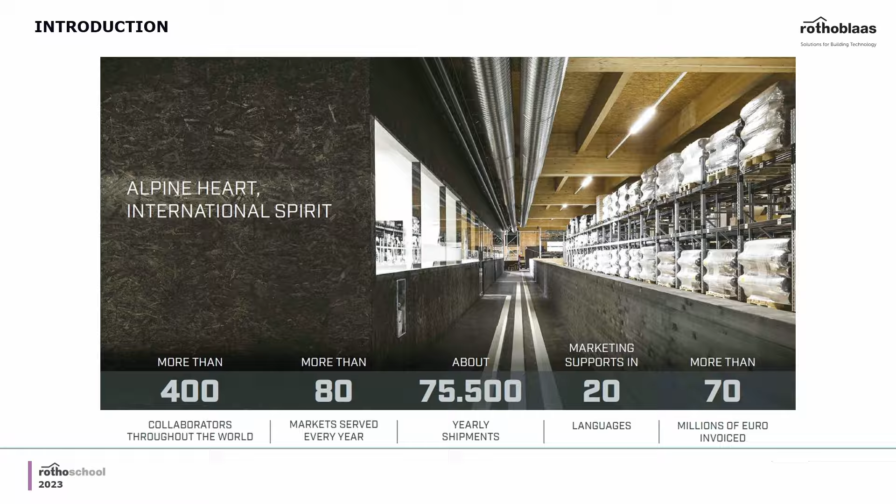As you can see here, we are more than 400 workers in Rothoblaas at the moment. Actually, we are almost 500 as we speak, because we keep on growing and growing. And as you can see here, but we're going to discuss more in detail also in the video lessons, this particular mass timber structure, we just recently finished the construction of this massive and very nice automatic mass timber warehouse that we have here in our headquarters of Rothoblaas. And this has already doubled the existing warehouse space that we have in Rothoblaas. So for us, it's practice what you preach.

We preach with our Rothoschools around the world to use timber, and also for our own project, we use timber. The use of wood and of timber structure, of course, for us is very important for, as you all know, a sustainability point of view, very, very important. And this is why we preach also the use of this kind of material, structural material in this sense. But of course, as you all know, timber is a material that a lot of people are passionate about, and myself, I'm the first one to be passionate about it. And second of all, it has a lot of very, very good structural characteristics that we'll see throughout the video lessons. And this is why a lot of people love timber, not only because of its beauty, but also because of sustainability and great performance, really.

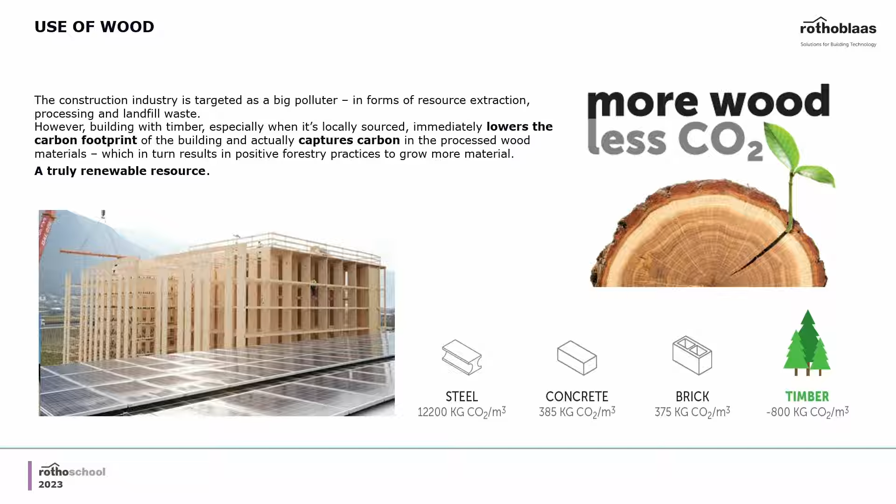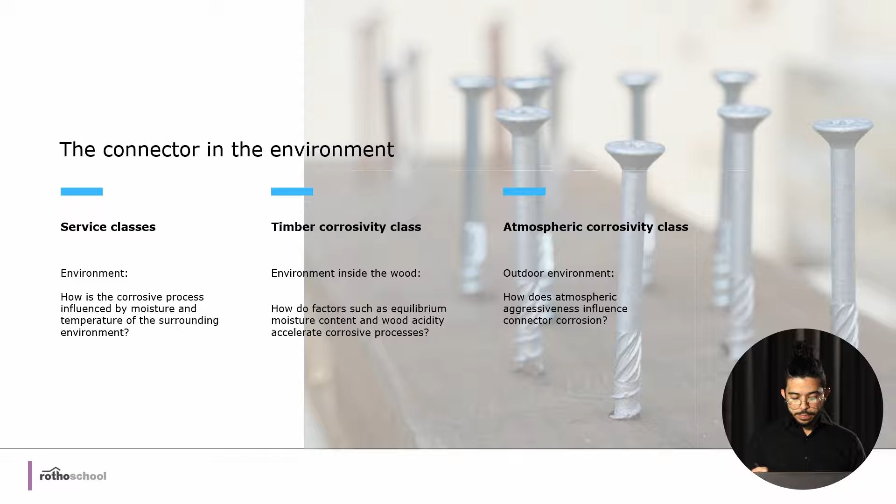To begin, we need to understand that corrosion is a completely natural phenomenon. It is not a matter of if corrosion will happen, but when it will happen to any metal, in this case fasteners. When we add energy to any mineral to transform it into a metal, in presence of the environment, that metal will tend to convert back to its initial mineral form. It is a natural phenomenon triggered by the contact of this new metal with the environment.

For corrosion to occur, three factors need to be present. I'm not a chemist, so I won't go deep into the electrochemistry of the process, but you need to know we need three things. The first, pretty obvious, is that we're talking about a metallic element, so we need an anodic reaction represented by the metal. A cathodic reaction, often represented by oxygen, so we need oxygen present. And finally, an electrolyte that allows current circulation, generally water. In residential and most construction cases, this is represented by water, so we need all three elements.

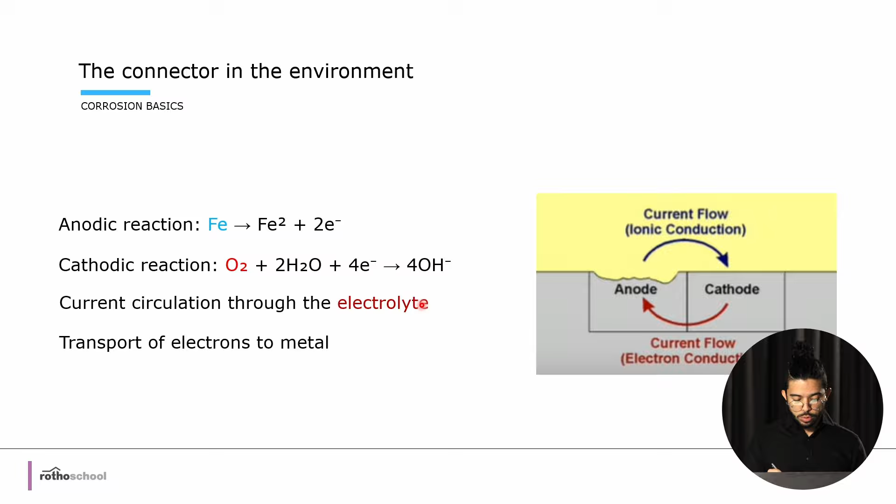There are three concepts within the regulatory framework, those same three concepts we saw earlier, represented by different parameters in different norms. The service classes are inside Eurocode 5, and the characteristic parameters that determine the service classes are atmospheric humidity, temperature and moisture, and exposure time.

The atmospheric corrosivity class is presented in ISO 12944, an international standard. It depends mostly on zoning - whether there is an urban, rural, or marine environment - and the presence of polluting agents such as acid rain or chlorides. Finally, the timber corrosivity classes, the newest concept, are presented by the recently approved European standard 14592. It depends exclusively on equilibrium moisture content and acidity. There are other factors that could affect timber corrosivity classes, which we'll look at further in the presentation.

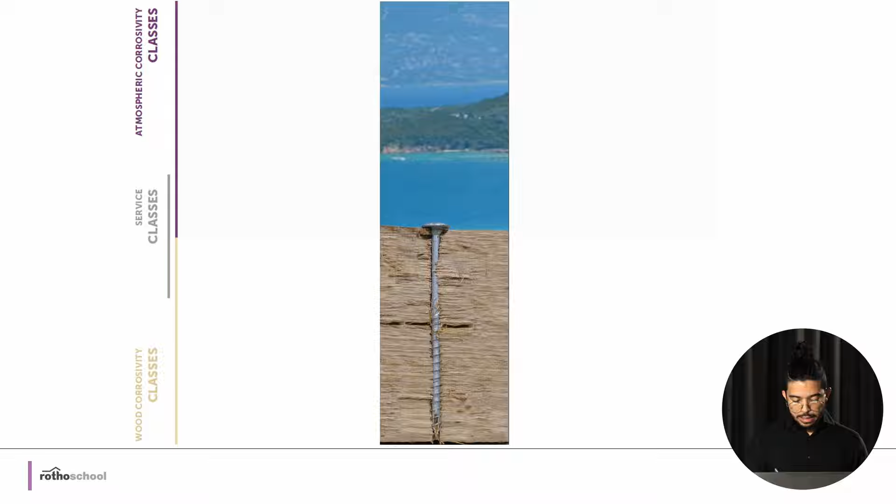So how do these three concepts play together? In the case of a fastener installed in a timber element, these three concepts act in different parts of the connection. The atmospheric corrosivity class concerns mostly the exterior and the contact of the fastener with the elements in the environment. So you'll have mostly the exposed head of the screw affected by the atmospheric corrosivity class. A small part of the screw in contact with timber will also be affected, but it's negligible, as atmospheric corrosivity class depends mostly on the ability of deposition of polluting agents, such as acid rain or mostly chlorides in this case.

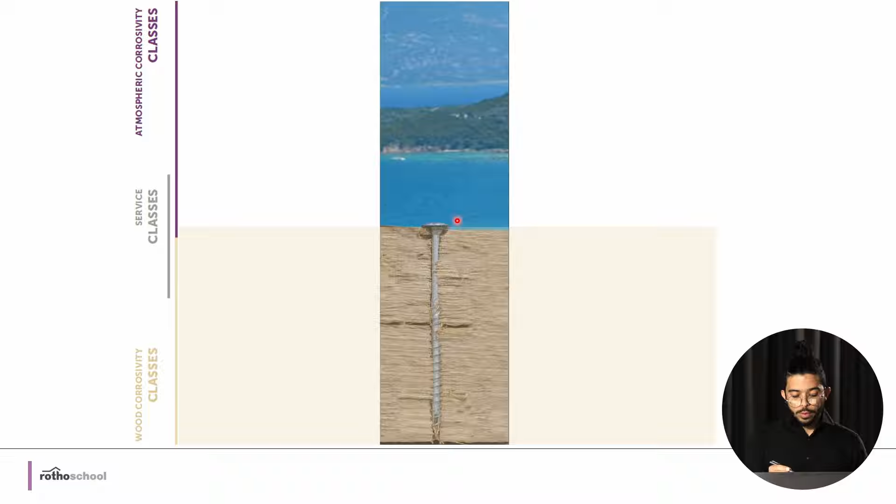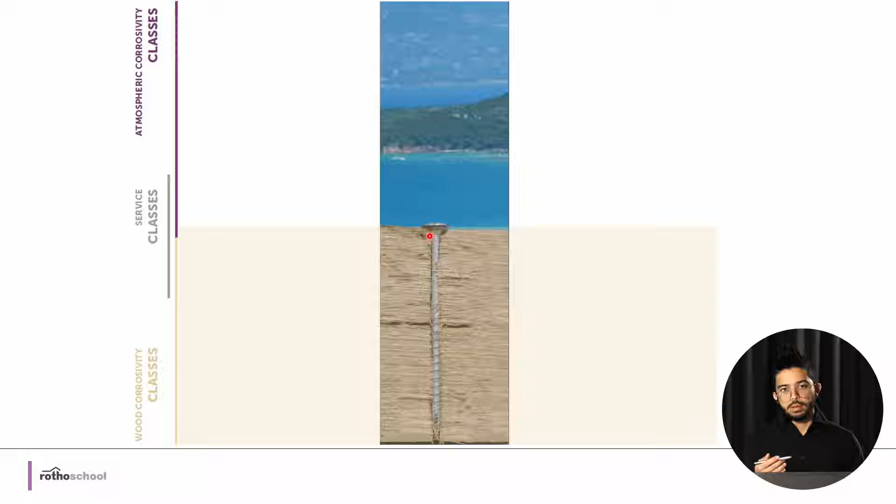Wood corrosivity classes concern where the element is inside the timber - from the tip of the screw to the external part of the wood where the screw is placed. If it was a plate, it could also be subject to wood corrosivity classes, concerning where the plate touches the timber. So everywhere the fastener, the metal, is in contact with the timber, the wood corrosivity class will affect the corrosion behavior of the connection, but no further.

Finally, the service class, the easiest of the concepts, takes into consideration the moisture content - I mean the atmospheric humidity - and the moisture content of the wood in the context of that atmospheric humidity. It's sort of a bridge between the atmosphere and the wood, but it mostly concentrates on the parameter of moisture outside and inside the timber, and temperature.

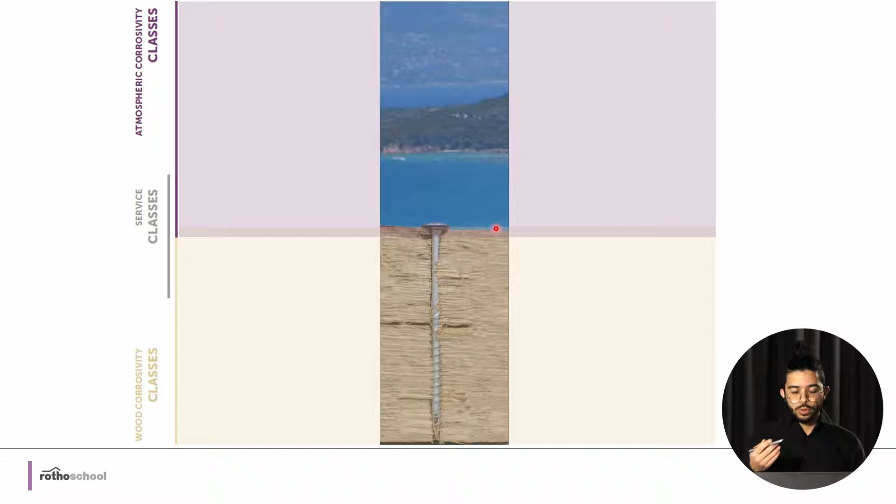When you see the two classes together, there is little to no intersection between those two affection zones, only a small line where wood corrosivity class and atmospheric corrosivity class intertwine. The wood corrosivity class ends with the wood, and the atmospheric corrosivity class starts after the wood. Put together, the wood corrosivity classes and atmospheric corrosivity classes are the link, the bridge between them.

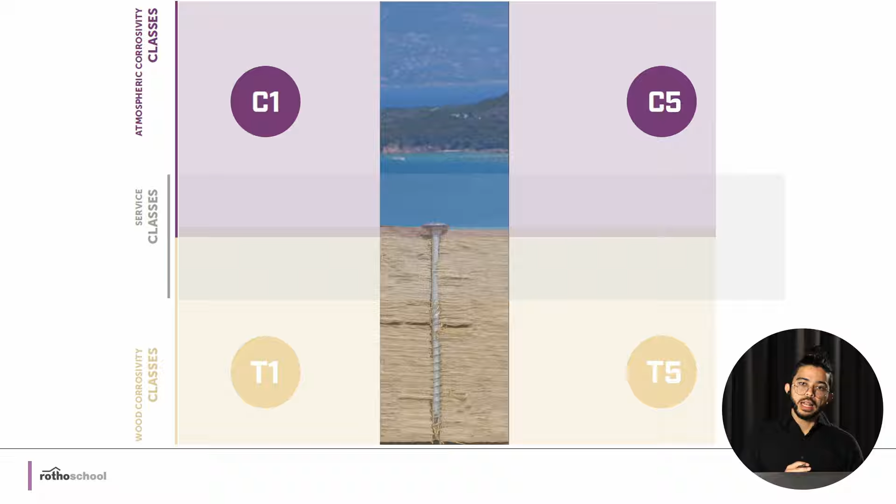The atmospheric corrosivity classes go from C1 to C5, represented by the letter C as already presented in the ISO standard. The timber class, the newest class, goes from T1 to T5 in an analogous way, T1 being the least aggressive, T5 being the most aggressive. Same for the C class.

Finally, service classes go from 1 to 3, service class 1 being the driest, and service class 3 the more humid. The newest Eurocode 5 will present a new service class, service class 4, which will be the maximum of the service classes.

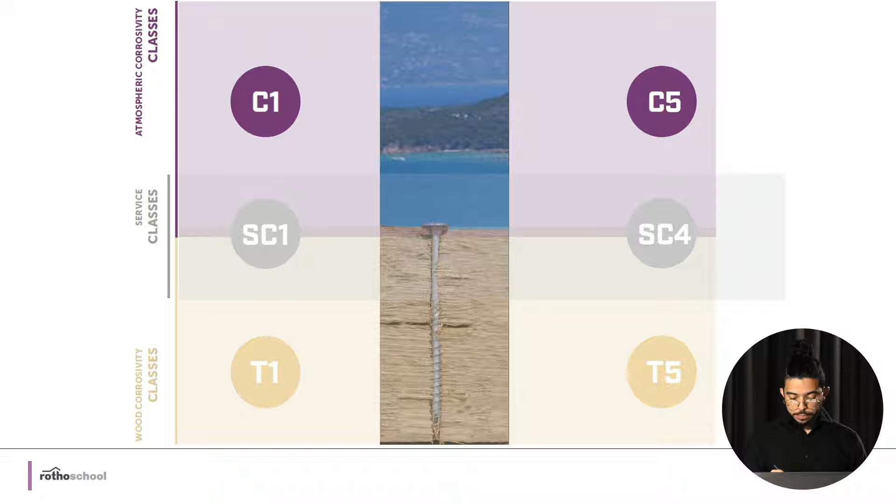As of today, in Eurocode 5, 3 classes are presented for service class. Class 1 is represented by 65% external atmospheric humidity, which translates to an equilibrium moisture content of 12%, the humidity inside the wood. It's normally what you would consider for an interior environment.

Service class 2 would be 85% atmospheric humidity, with an equilibrium moisture content inside the timber of around 20%. It would generally be an element that is not inside, that is in an exterior, outdoor environment, but not exposed to weather conditions.

Finally, service class 3 was for elements more humid than class 2, where equilibrium moisture content was above 20%, categorized as wet elements. This is the current state of the art, what the standards currently present.

What is coming in the new Eurocode 5 will be 4 service classes. Mostly service class 1, 2, and 3 would remain as they are now, and service class 4 would be the new one. There are well defined threshold limits from one to the other, represented by a maximum or upper limit, and an annual average.

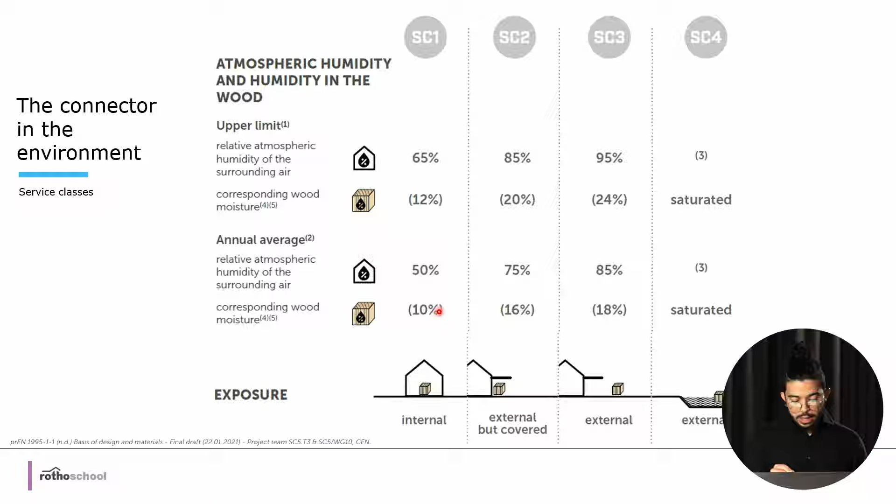This is also a novelty, the annual average. You can measure the service class based on the limit or the annual average. So inside the timber, you have 10%, 16%, 18%, and saturated.

We will check in the next slides why this is happening and why it makes sense. But this is in general the novelty of it.

Service class 1 in terms of exposure will remain generally the most common case, internal elements. Service class 2: external but covered or protected against weather conditions. Service class 3: external elements unprotected. Service class 4: external wet elements that are saturated.

The atmospheric corrosivity class is classified from C1 to C5, and the categorization depends heavily on moisture. Water or water vapor is the means used by polluting agents to get from one element to another, to deposit on surfaces. So if an environment is drier, it's less probable that polluting agents can deposit on any surface. The wetter an environment is, the more aggressive it is in terms of deposition of polluting agents.

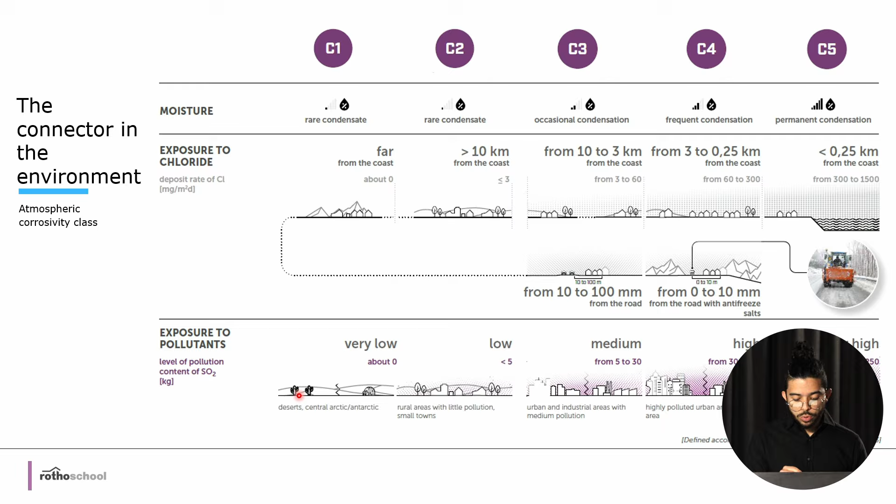Exposure to pollutants used to be very important in the 70s and 80s, but emission policies have changed and become very strong, so it is not as important now as exposure to chlorides. Nonetheless, in an industrial environment, the deposition content of SO2 can be important, ranging from C3 to C4, so depending on the pollution level of SO2, you can also change the atmospheric corrosivity class.

If you want more detail, you can see it's measured aside from the distance to the coastline. There is a deposition rate of chlorides, so you can check what the specific deposition rate is for your building.

Just to show some examples: this is an example of a C1 place. C2 could also be an internal environment with high humidity, like a gym, or a classical exposed element that is weathered but not directly exposed. C3 environments can also be internal, like breweries or industrial factories with low, not so aggressive pollutants. A C4 environment could be a salt silo or a swimming pool. And finally, C5 environments are elements very close to the sea.

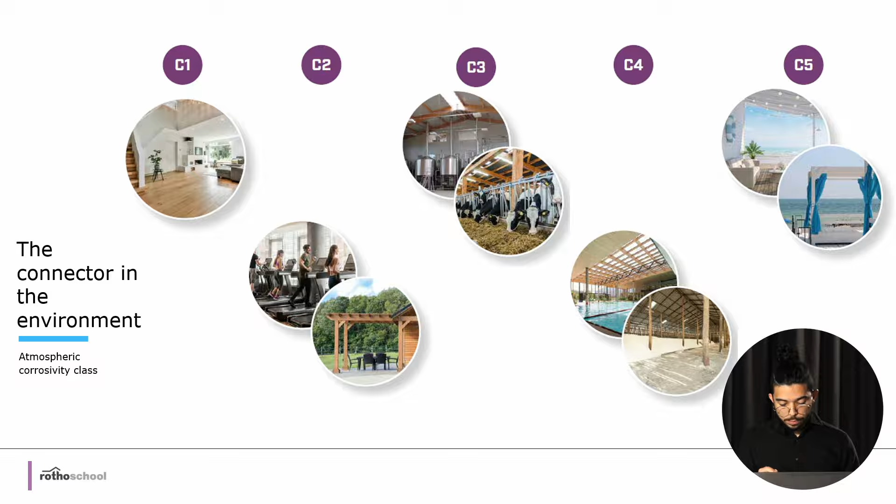If you want to go into the details of your city or construction site, there is the exposure site catalog, a European funded project to map atmospheric corrosion categories around Europe. I recommend looking it up online. It gives an overview of many places, mostly research centers and universities, where you can check the corrosion rate on different metals across Europe. This is a growing project, so even if your city isn't available today, it may be in some years.

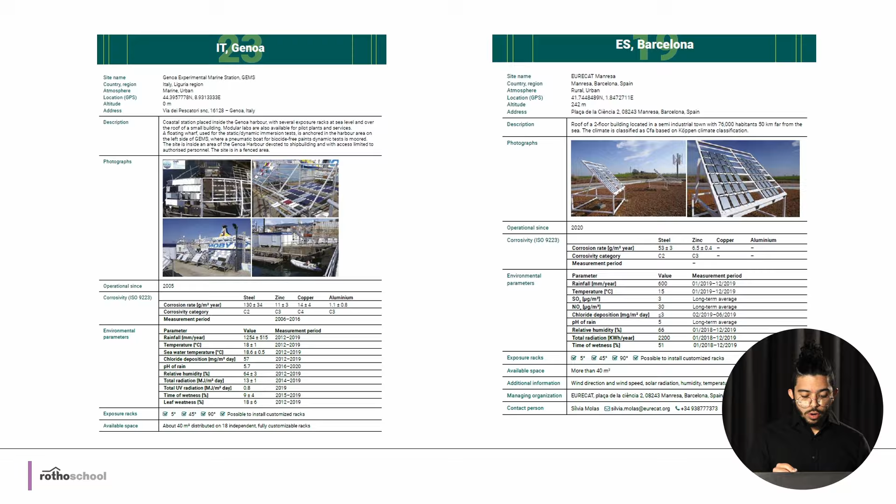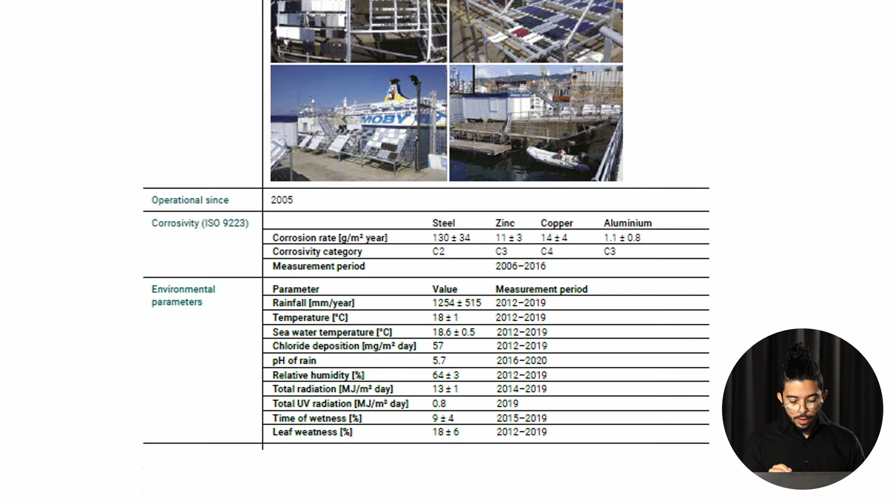For example, for Genoa in Italy, you'll find a chart showing the corrosion rate for zinc, which is important for us since every fastener is coated with a zinc layer. For regular fasteners, the corrosivity category is C3 - so it's probably not right on the coastline, but still a C3 environment. For aluminum, it is also C3. For copper, it is C4. So you could get different results than just measuring the distance from the coastline.

As you can see here, for zinc it is C3. If you look at Barcelona, for example, which is probably further from the coastline, the zinc corrosive class is also C3. So I recommend you check this for your own location.

Let's go to the timber corrosivity class. As I said before, this is the newest concept, and this is the way that it will be presented.

That is actually presented in EN 14592, the norm for fasteners, and that will also be referenced in the new Eurocode 5, which should be available in 2025.

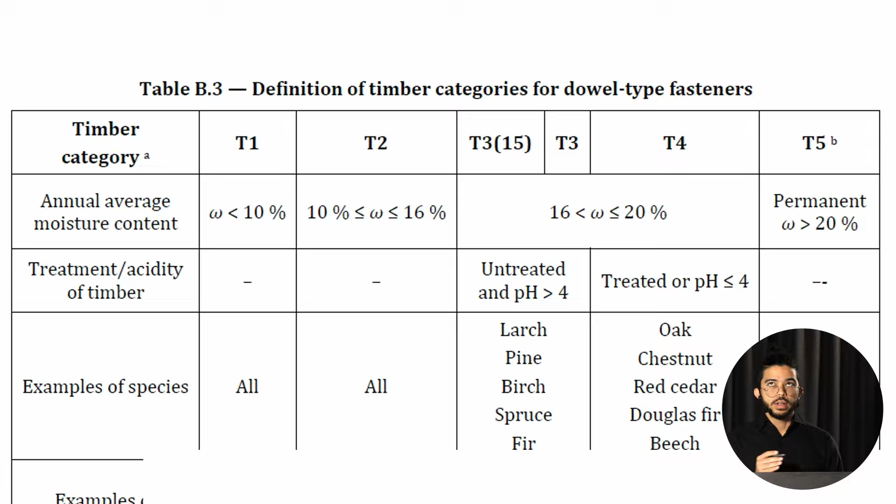So I said earlier, remember the upper thresholds of the mean values of the service classes, because they are related very closely to the timber categories. As you can see, you have 5 categories for timber aggressiveness, going from T1 to T5. The first and main parameter that affects timber corrosiveness is moisture content, the average moisture content.

So every species with moisture content less than 10% can be considered T1. Every timber species, even if treated or not treated, if it is in service class 1 - because this is what service class 1 means - you can consider it non-aggressive, or the least aggressive possible.

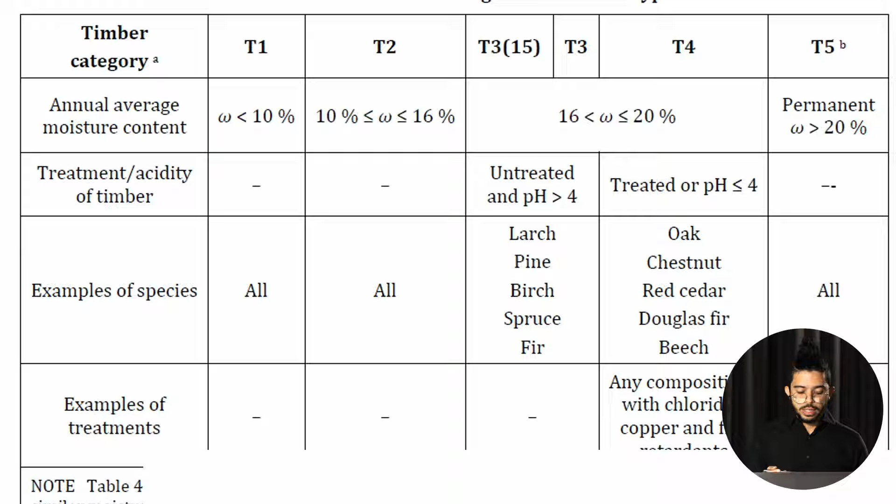T2 instead goes from 10% to 16%. Again, every species, whether treated or not, regardless of the kind of wood, in these conditions of moisture can be considered T2 class, which is a higher level of corrosiveness, but still low.

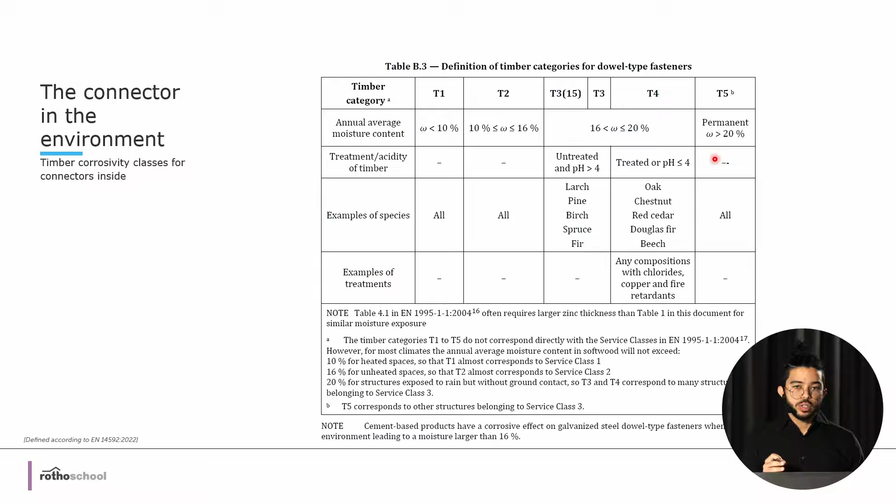I'm going to T5, so we can also check that box. T5, every timber class that is permanently above 20% of internal moisture content, can be considered T5, which is the highest possible aggressiveness level.

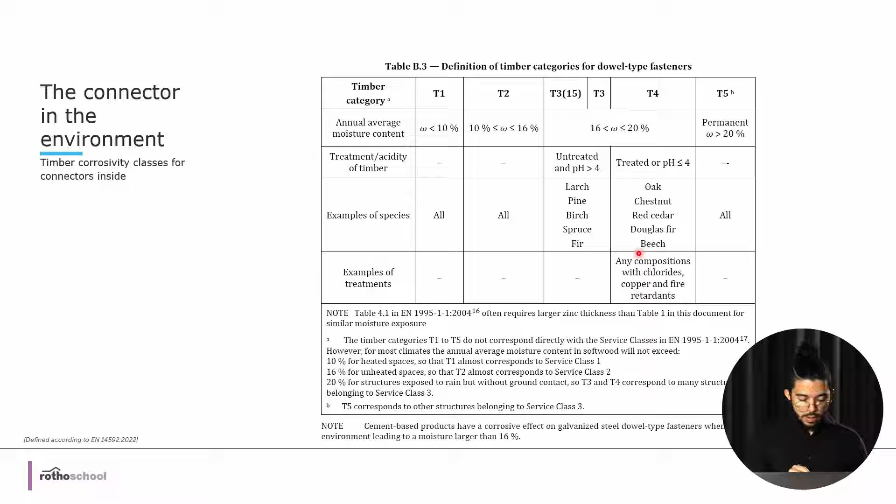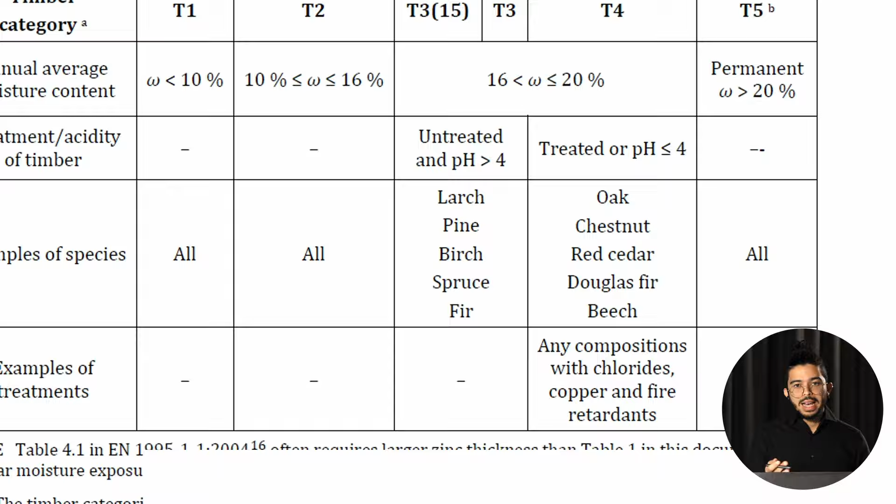So whether it is non-acid or acid, non-treated or treated, if it is above 20%, it is considered very aggressive. Finally, let's get into the details of these 2 classes, T4 and T3. There's a division between when you are between 16% and 20%, a division between the classes, and it is concentrated in the pH - here is where the acidity, the species, and the acidity related to the species influences the norm.

So there are some species that are more acid than others. The parameter for measuring the acidity is the pH, and that would represent whether your species is in the T3 category or the T4. But remember as well that this range from 16 to 20 is for service class 3 only.

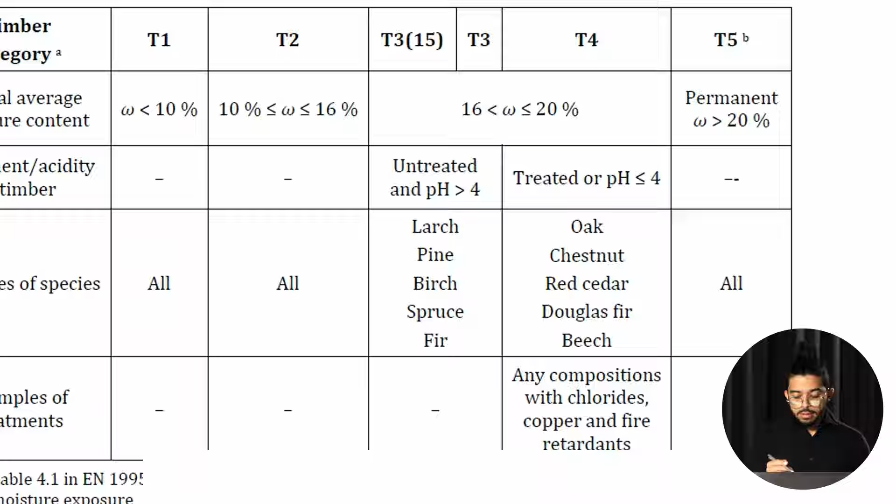In most cases, if you are in a full indoor environment or in an outdoor but protected environment, you cannot do this further deep analysis into the species. If you are in service class 3, though, you have to check the species and the acidity of them.

So in T3 you will see the most common species: larch, pine, birch in construction, and they have a pH above 4. Less than 4 would be considered T4, and most of them are hardwoods, which we should consider aggressive timber - oak, chestnut, cedar, Douglas fir, and beech.

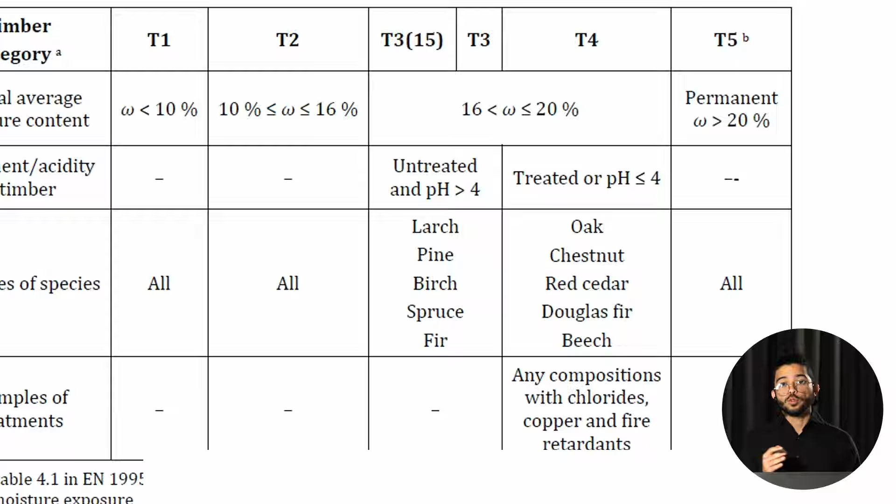In T4 also fits every example of treatment that adds a substance into the mix. Generally, there are compositions with chlorides or copper and fire retardants. It's very important that you check the kind of treatment used for the element, to check if it will influence the acidity, so it will get into a T4.

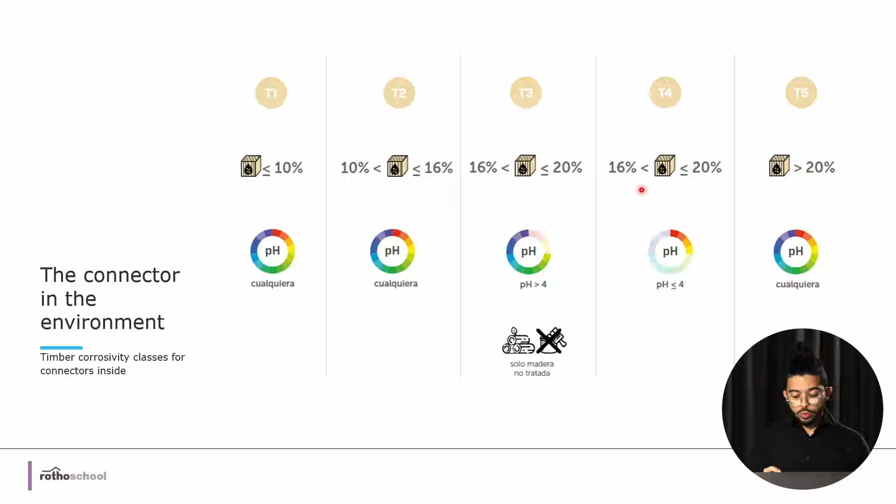To simplify and summarize, these are the 5 classes from T1 to T5, and the moisture thresholds. If you compare it, this also makes sense with the new 4 classes, because under the current Eurocode 5, timber class 1 fits completely into service class 1, and timber class 2 fits completely, or mostly, into service class 2 as well. But then you will have 3 timber classes, T3, T4, and T5, that will fit.

All of them will fall into service class 3, regardless of the difference in humidity. So the new, upcoming classes will divide these cases so that T1 will fit service class 1, T2 will fit service class 2, and T5 will fit completely into service class 4, which is an extreme condition, so that when you have service class 4, you will always have a T5, and that's it.

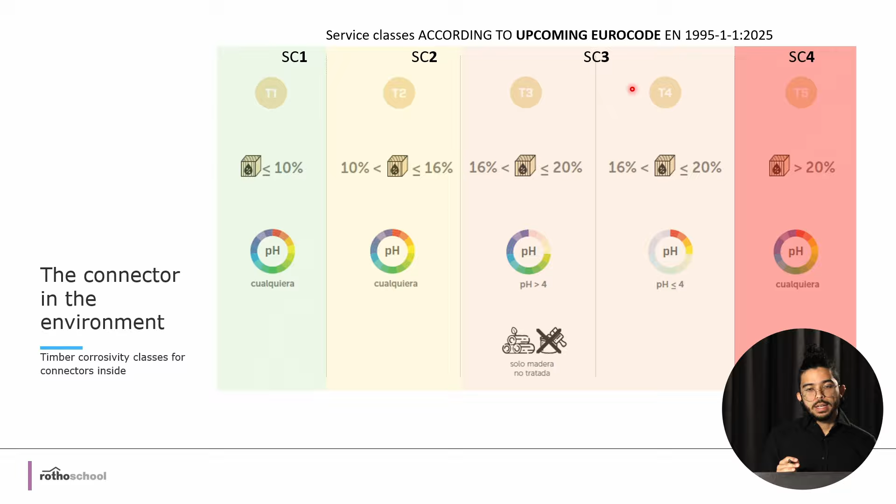The same goes for T1 and T2 - if you have service class 1, you will always have a T1. Service class 3 will remain the focus point, so when you are in service class 3, you need to be aware that you can have a T3 or a T4. It will depend on the pH, the acidity of the timber, and whether the timber is treated.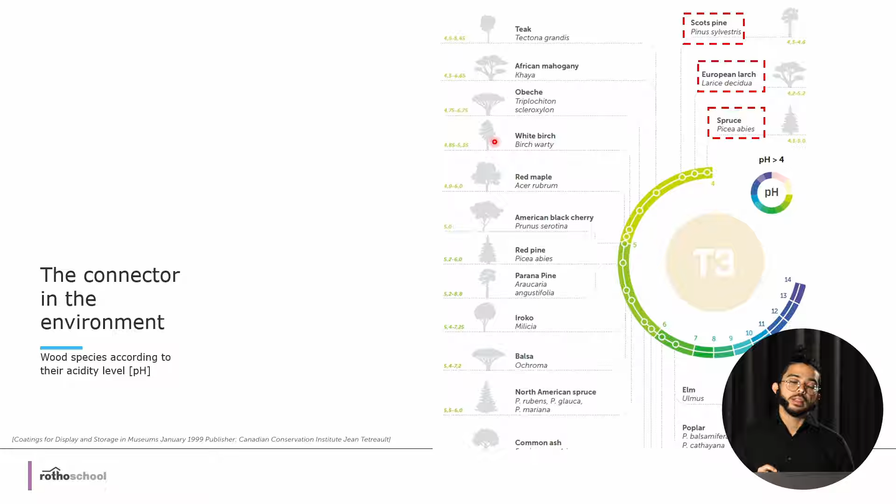The pH—let's go inside the element of the tree. As I said before, it depends on the species, and it varies. Most construction species fit into the T3 category, so spruce, European larch, and pine, like Scots pine or Baltic pine, fit in T3. As you can see, there are many of them here, so I recommend you check where the class you're using fits, in T3 or T4.

In T4, you will see many hardwoods. It's not necessarily that every hardwood is a T4, but many are. Oak is a very important acid species. Douglas fir, very common in North America, is a T4.

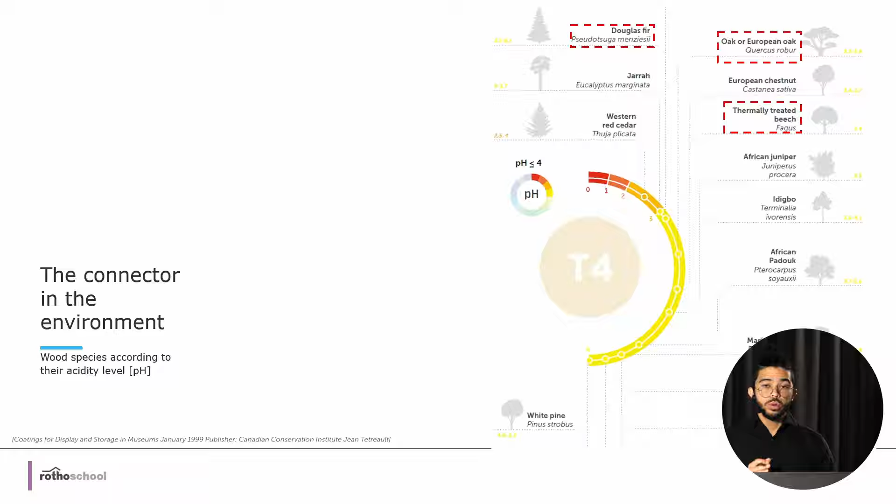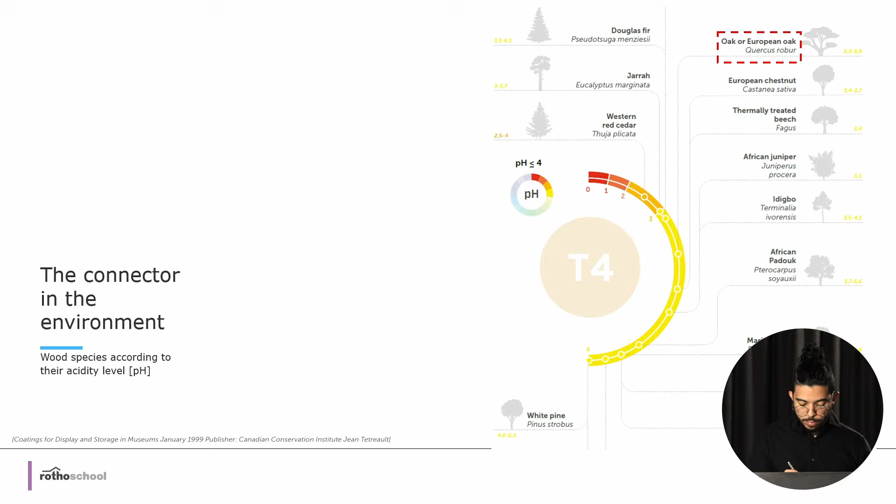A very interesting case is thermally treated woods. Let me zoom in here. You can see that thermally treated beech has a 3.4 pH, which is very acid—the limit is 4. But untreated beech, which you can find here, has a 5.9. So the thermal treatment has a strong influence on the pH, changing even the aggressiveness of the element. Be aware that thermal treatments can also affect the acidity and aggressiveness of these trees and timber.

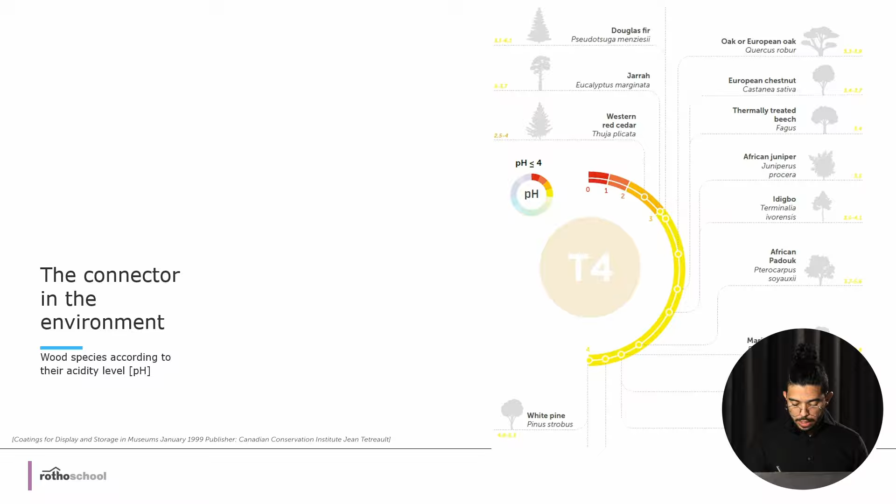So why does this change make sense, apart from the design? Currently, the service classes relate to the corrosion rate of zinc, which is the most common coating. Service class 1 goes from 0 to 10 moisture content threshold. As you can see here, the corrosion rate is completely 0, so you are completely free of corrosion in service class 1.

Service class 3 goes from 20 to 50, more than 20. The corrosion rate goes from 10 above, so you are very sure that in service class 3 there's going to be active corrosion. But in service class 2, you are in a gray area where from 10 to 16, corrosion can or cannot occur, and from 16 to 20, corrosion in most cases will be present. So it's a gray area where you're not sure if corrosion can happen.

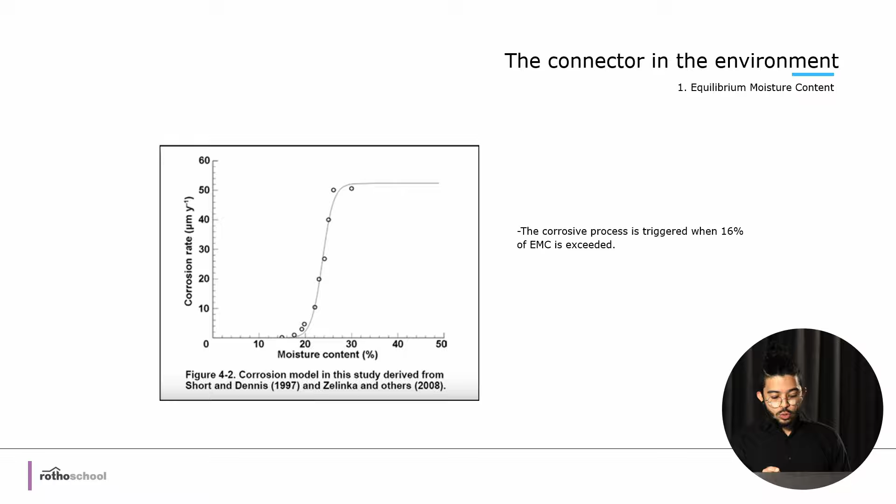This is what is present at the moment. The corrosive process is triggered when 16% equilibrium moisture content is exceeded—16% is right here. This is where the first point is measured.

This graphic can also be used to project and design the necessary coating of connectors. If you know your building is going to be exposed for 10, 12 years, you want to know how thick the coating should be, because you may also be changing the fasteners. You can design the coating thickness following this graph.

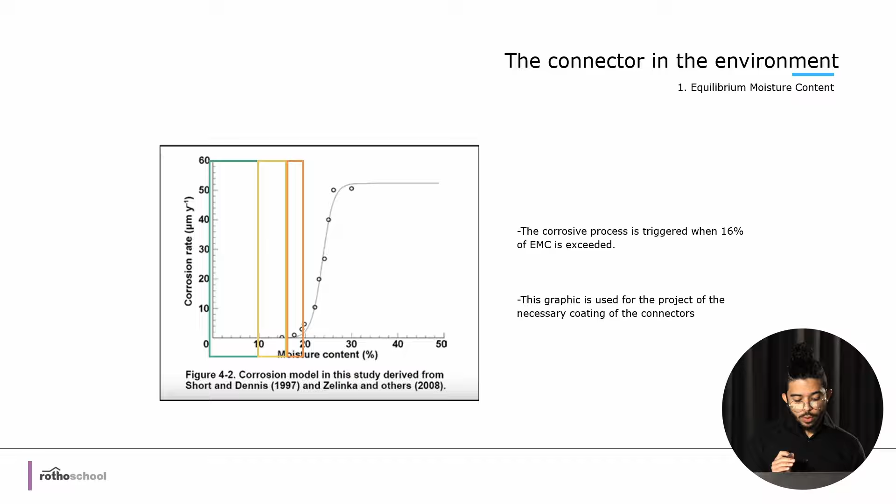This is how the new service classes fit into this chart. Service class 1 is the same as before. Service class 2 ends at 16%, so the probability of corrosion is very, very low. In service class 3, as we saw before, the probability of corrosion is present, and in service class 4 it's high—corrosion is completely present and the corrosion rate is very high. That's why these four service classes make sense.

The norm prescribes different coating thicknesses for each class. If you are in service class 1, or a T1 environment, you can avoid having coating at all. From classes 2 to 4, it will be necessary. In class 2, at least 10 micrometers of zinc coating would be needed—this is common on the market for screws, timber screws.

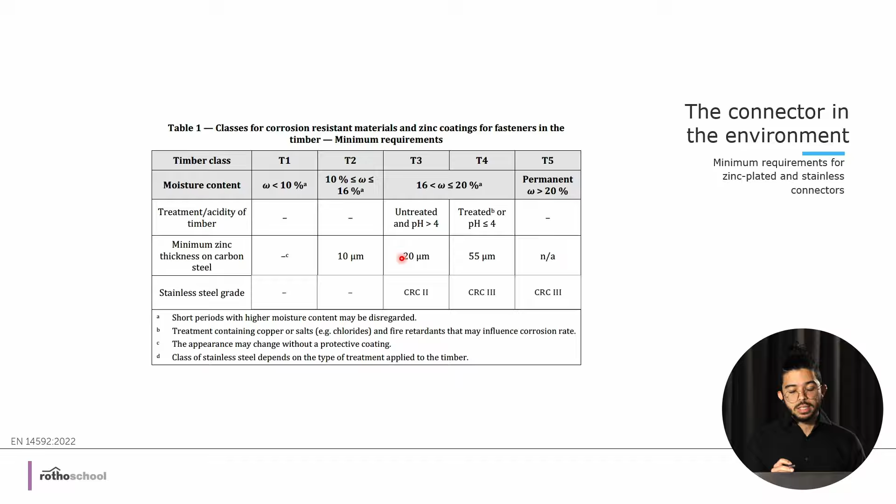T3 to T4, you start needing an important coating level. For T3, 20 micrometers is necessary, and for T4, 55 micrometers will be required. That's a very thick element, so it's difficult to produce such thick zinc coatings that will fit this requirement, at least for screws.

You can also use stainless steels. A T3 can be represented by a CRC2, then T4 and T5 would require at least a CRC3. These are the requirements from Eurocode 3. You'll see that T3 would be represented mostly by an A2 steel, and the CRC3 we talked about is an A4, just to give an example of what can fulfill that requirement.

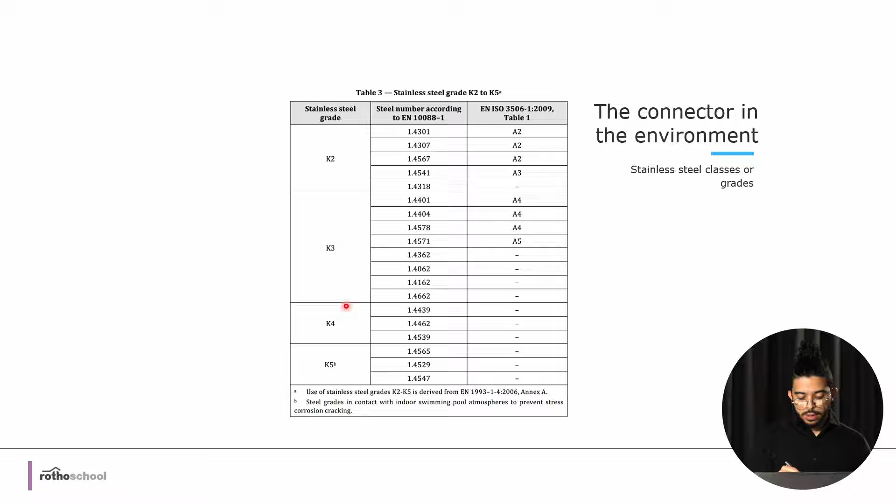This is the chart that you will find. You'll see these are the CRC classes: CRC2 is A2, CRC3 is A4, and there are also CRC4 and CRC5, which are higher corrosion resistant stainless steels.

As I told you before, it depends. The corrosion categories depend on the distance to the sea. If we make a correlation between corrosion resistance and the distance to the sea, we can find which coating we need depending on how close we are to the sea. So there is no zinc coating that could fit the C5 corrosion class, and the C4 corrosion class will be very difficult to fit with zinc coating.

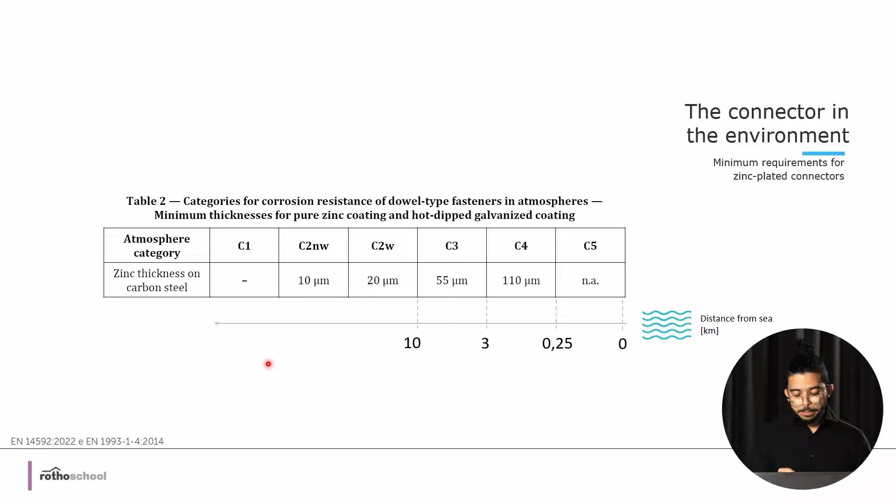We're talking about atmospheric corrosion. From 3 to 250 meters, you will need 110 micrometers. From 10 to 3 kilometers, you will need 55, and above 10 kilometers you will need less, 20 micrometers, depending on how close you are and the deposition rate of the chlorides.

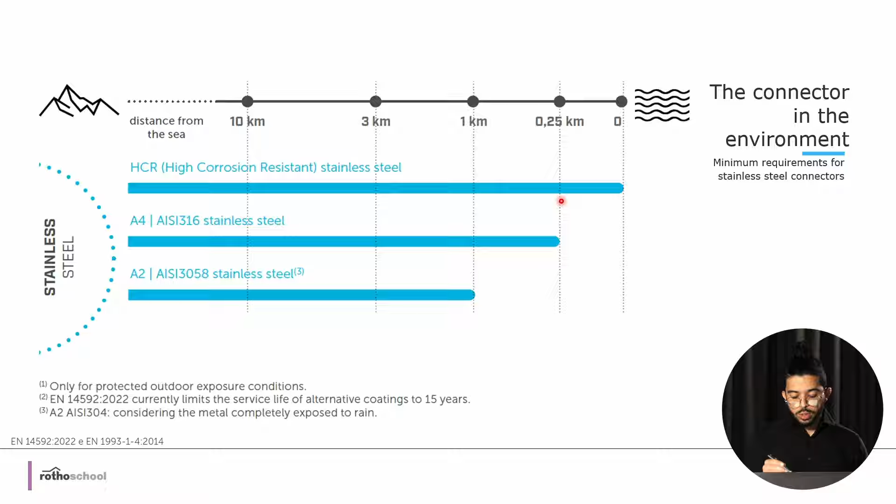And concerning stainless steel, we talked before about zinc, now this is stainless steel. For closer than 250 meters, you will need a high corrosion resistant stainless steel. This is the only solution we have for elements very close to the sea. A4 will start performing well, suitable from 250 meters to the coastline, and A2 from 1 kilometer to the coastline.

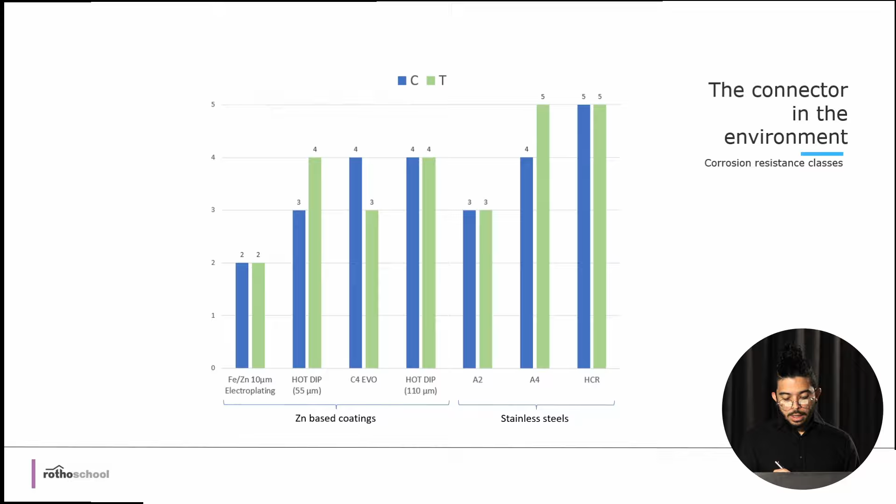Putting everything together, placing the requirements of corrosion resistance and timber resistance, this is what a chart would look like for the corrosion resistance of the different coatings, whether we are talking about zinc-based coating or stainless steel.

For example, if we're talking about a regular standard wood zinc-plated screw, you would fit into this class: C2 T2, resisting a corrosive atmospheric class 2 and a timber environment of class 2. A hot dip could resist an atmosphere of 3 and a timber of 4. Our coating C4 Evo, an alternative coating, would resist an atmosphere of class 4 and a timber class 3. This is very important: for resisting a 4-4 condition, you would need a hot dip of 110 micrometers.

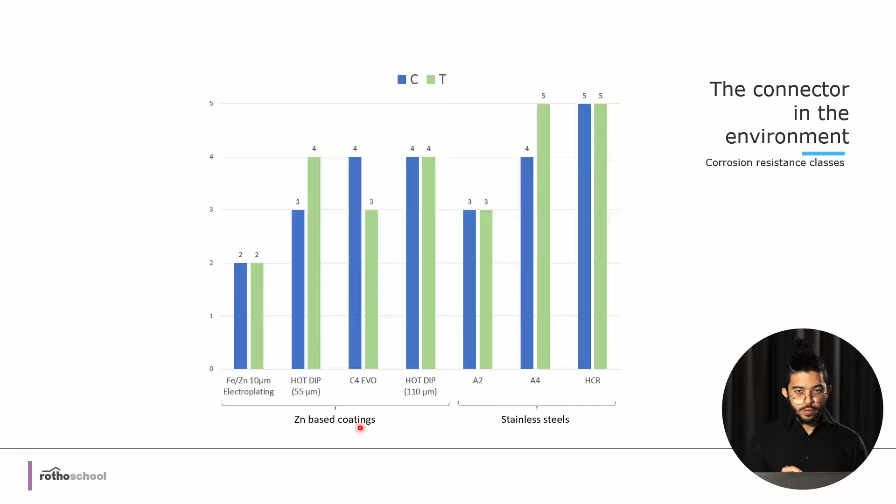Then for stainless steels, you can do the same game. A2 will resist a 3-3, A4 will go 4 and 5, and HCR, the most resistant, high corrosion resistant, will go 5 and 5.

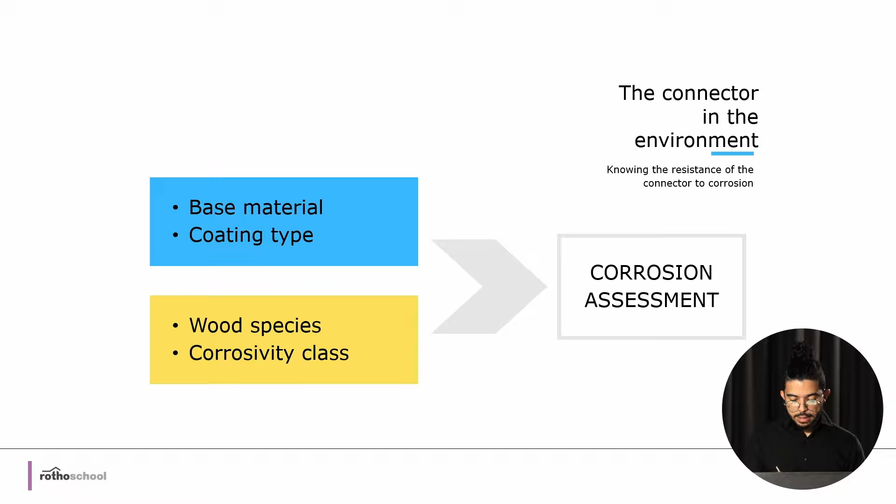So we had a look at the base material, at the coating type. These are the requirements for the connectors. We also placed together the wood species and the corrosivity class of the environment, allowing us to do a corrosion assessment we can use in the design to check if we did a correct design selection. But we need to ask ourselves as well if the connector is in a safe condition.

For this assessment, the most important parameters to consider are right here. We saw how the equilibrium moisture content affects the aggressiveness of the classes, whether atmosphere or timber. The pH inside the timber, the acidity, also affects corrosion. Point 4, polluting agents like chlorides mostly determine the atmospheric corrosion class, as we also saw.

So we are left with two points that are important as well: tannins and galvanic coupling. Let's take a look at the first, tannins. We did an experimental test, an experimental campaign, to check the effect of tannins, based very much on the experience Samuel Zelinka already had. We placed one of our screws for 2 to 6 months in green oak, service class 3.

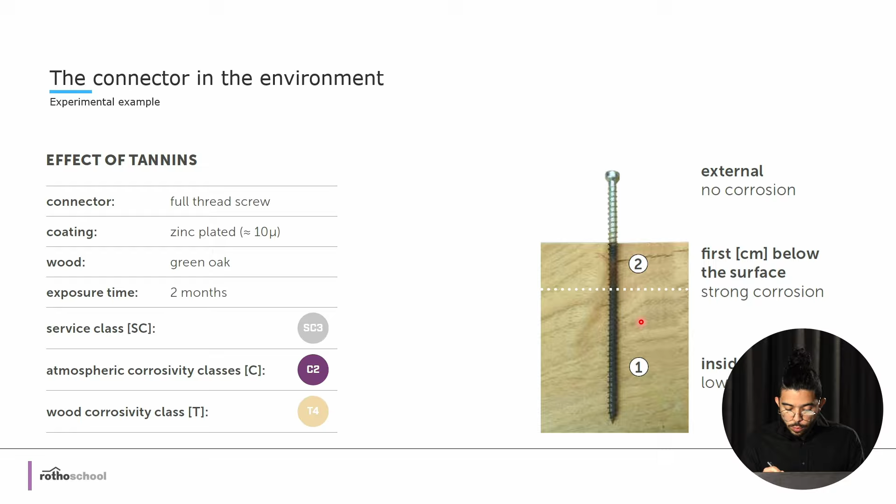Outside of Rothoblaas headquarters, we're in a C2 atmospheric class, and the wood corrosivity class, being green oak, is T4. So what happened to this screw? On the exterior, you will see no corrosion because it was a C2 atmospheric corrosion class, so in that period of time no corrosion happened. Inside of the wood, you will see a black coating, but you won't see rust, red or white.

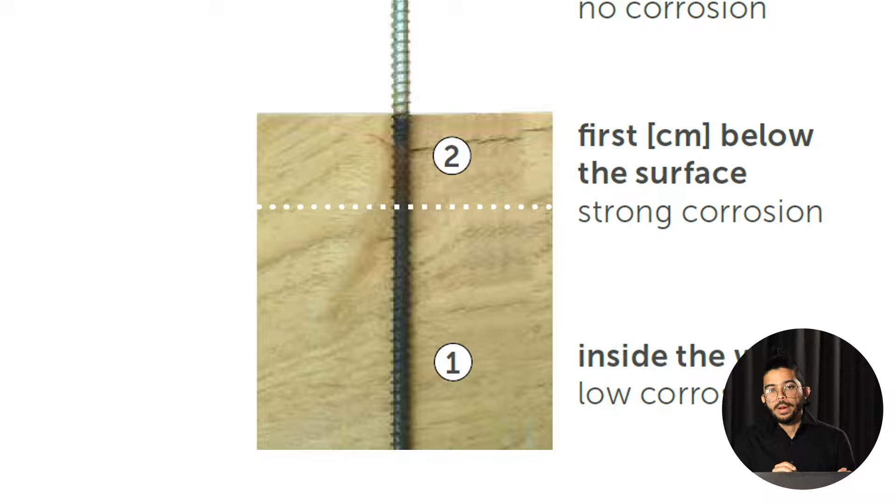You will see a black surface, and so you would deduce it is low corrosion. But in the first centimeters below the surface, you will see red rust, that is strong corrosion. What happens is that the tannins create a protective layer, attaching to the surface of the fastener, increasing the corrosion resistance of fasteners. But in the area marked number 2, water can wash down the tannins. When it rains, water can penetrate more or less until the white dots, washing the tannins and then allowing corrosion to increase.

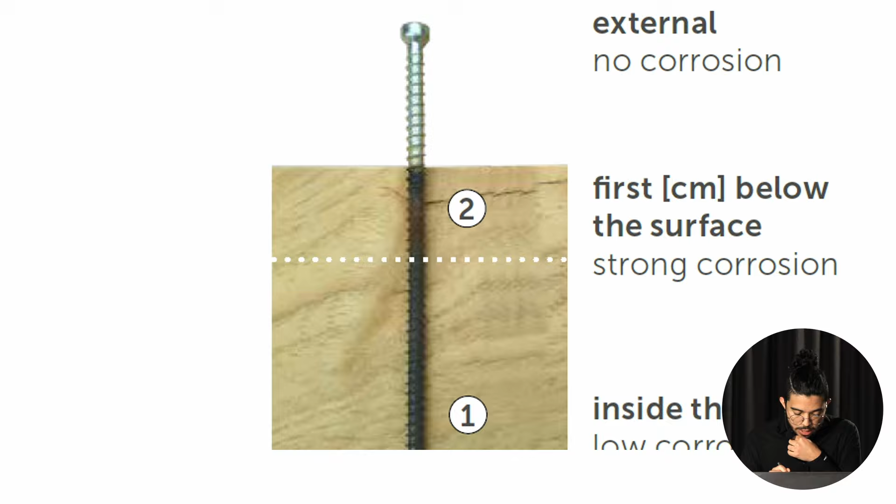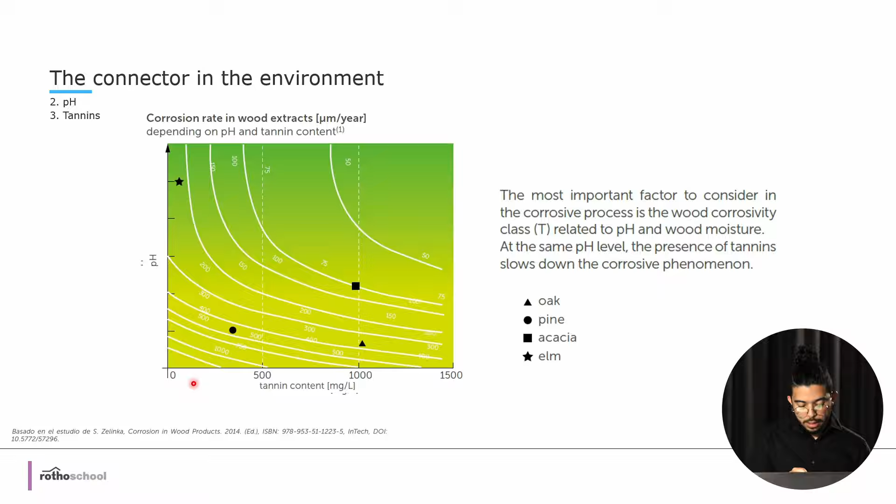If we take a look at these two elements, pine species and an oak species, with a very similar pH, you will see that the corrosion rate is different. The oak has a corrosion rate about 350 because it has a very high tannin content, around 1,000 milligrams per liter, while pine has a corrosion rate of 450 micrometers per year, more or less. The clue here is that the tannin content of pine is a lot less, determining that the corrosion rate is higher in this case.

The conclusion with tannins is that they are not a catalyzer or accelerator of corrosion, but a retardant, a corrosion retardant. It's very important to say that nonetheless, the pH is the most determining factor for the speed of the corrosion process.

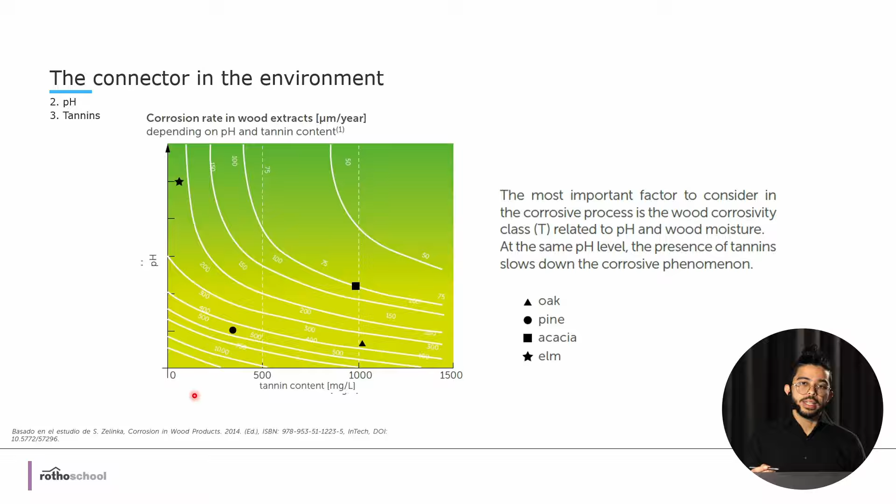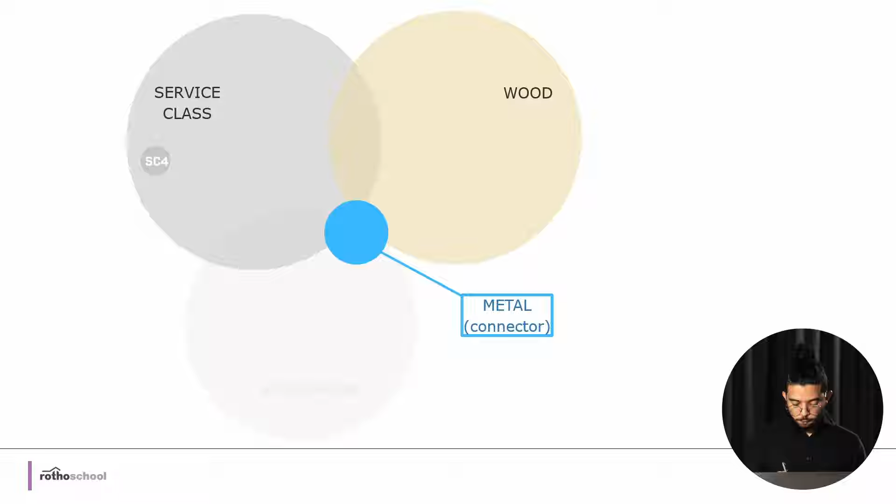To conclude with this assessment, there's the selection and the atmosphere assessment. You need to check the service class where the metal is, the timber or wood element where it is, and also the atmosphere, or where it is.

So these three environments play a role together. The atmosphere and the service class will give you the atmospheric corrosivity class, and the wood and the service class will give you the timber corrosivity class. The combination of each factor gives you one of those elements.

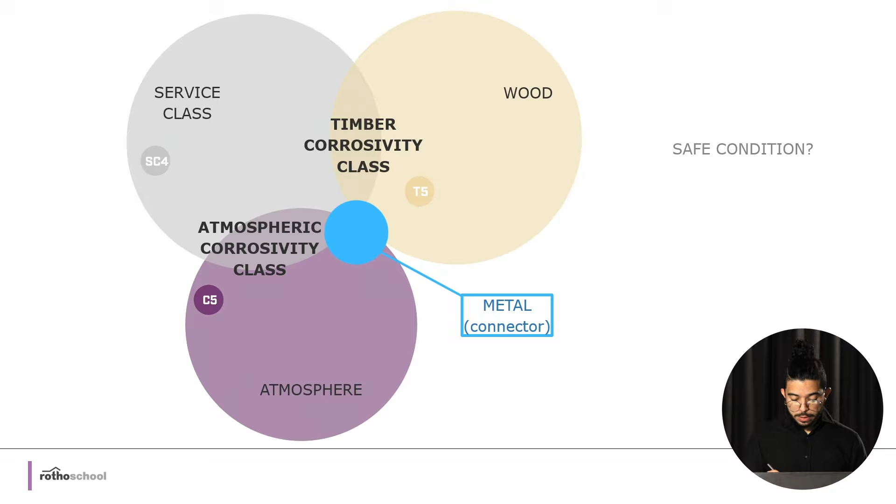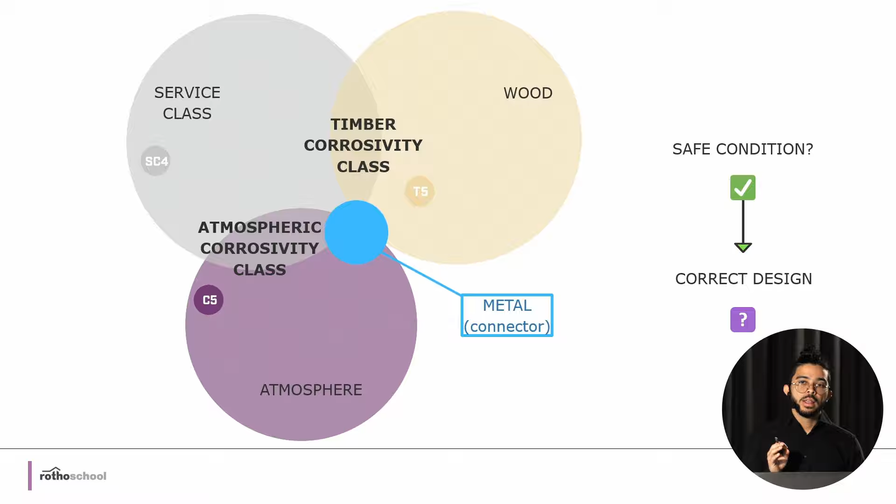So if you chose the right metal to fit those factors, you can also say that the fasteners are in a safe condition. But it is still necessary to check if the design was correct, because even if you choose the right fastener that fits all of those categories, the assessment is not yet finished.

So another thing that can happen, and the other concept that we left out in the list, is galvanic coupling. Many times you are not only joining timber elements with fasteners, but you're also joining plates with timber using a fastener. Three elements need to be present in order for galvanic coupling to happen or be an issue at all.

If one of these elements is not present, you can be sure that galvanic coupling does not happen. The first thing is that we have different metals, elements with different electric potential. So you will have a plate, for example, which is a carbon steel plate with an electroplated zinc coating, and a screw, which is an A4 stainless steel screw. These are elements with different electric potential. We'll see that also in another slide.

The presence of an electrolyte - we're talking again here about service class 2, service class 3, even service class 4, not service class 1. If the electrolyte is not present, then this won't happen. Finally, direct contact between the metals, so electric continuity between the metals. You would say this is obvious, but you will see that this can also be avoided and prevented in some ways.

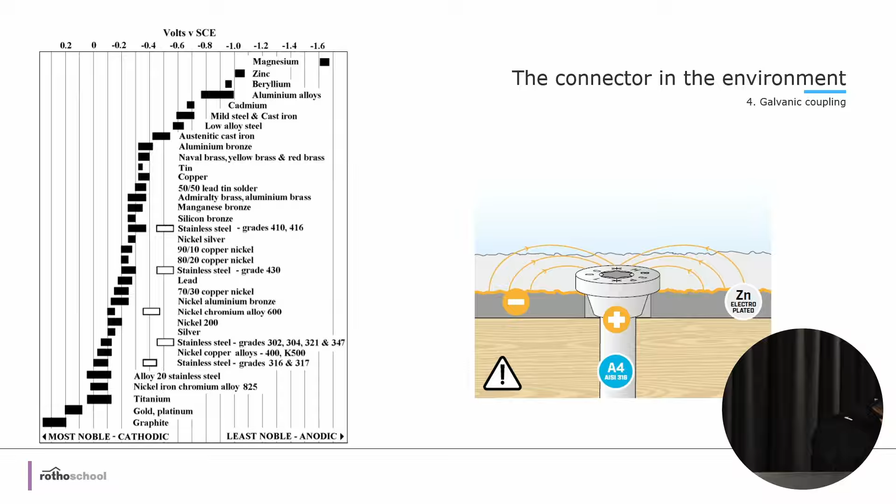So what do we mean with galvanic, with difference in potential? In a chart, in a galvanic series, you will see that the metals are placed with different voltage, different potential, going from the most noble, thus the cathodic, the one that will not tend to lose metal and corrode, to the least noble, the anodic, the one that will corrode. In this chart, the further away one metal is from the other, the higher the potential, and the higher also the corrosion rate.

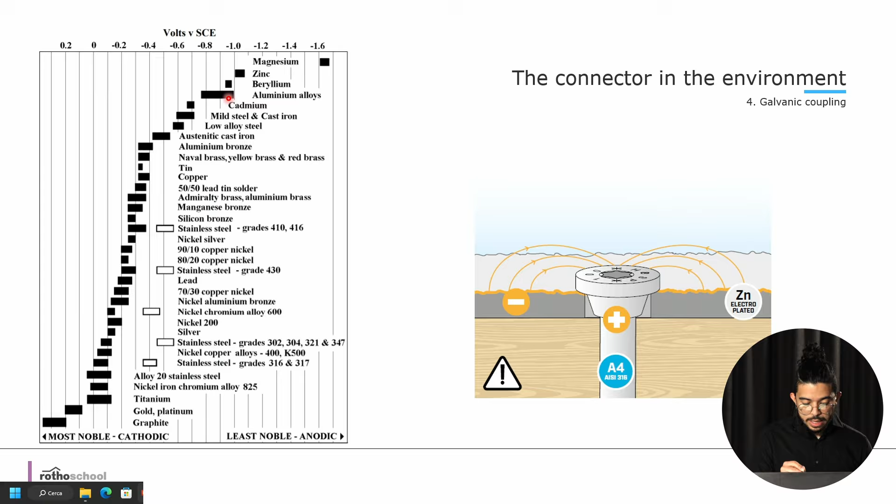So in this case, you see that stainless steel, this 316 stainless steel, will fit more or less here - this is the voltage of the stainless steel. Compared to the zinc, there's a lot of difference, and thus the corrosion can happen, the corrosion will happen. If we were talking about, for example, zinc and aluminum alloys being very close, the difference in potential is very small, and thus the corrosion would be really, really slow, so slow that it can be considered in many cases as negligible.

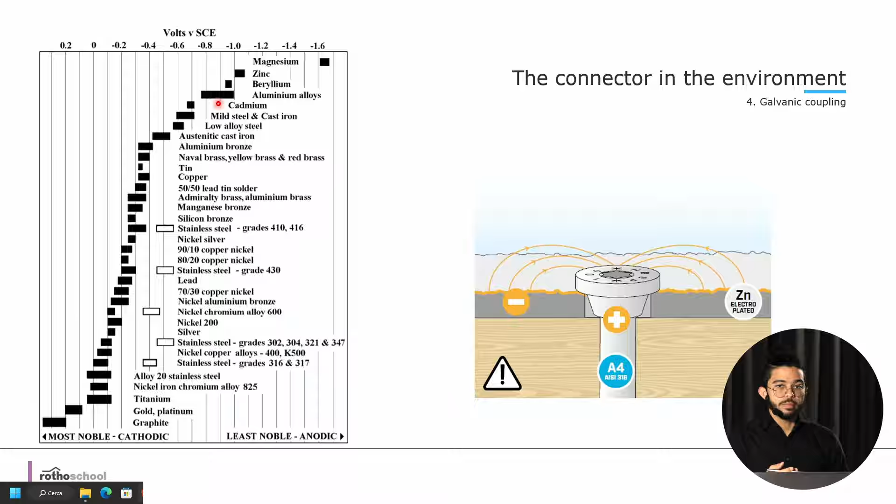What can you do to prevent galvanic corrosion coupling? The first thing you can do is disconnect the electrical joint between metals. This relates to the third principle, which is direct contact.

Placing an element like an EPDM washer between them can prevent the galvanic coupling from happening. You can have a zinc electroplated fastener with a stainless steel plate, avoiding contact between them. This avoids the circuit starting and the corrosion happening.

You can use similar metals with little difference of potential. As I mentioned before, in the galvanic series, if metals are close to one another, for example zinc and aluminum alloys, they can be used with one another since there's very little difference of potential. That can work, depending also on the kind of alloy.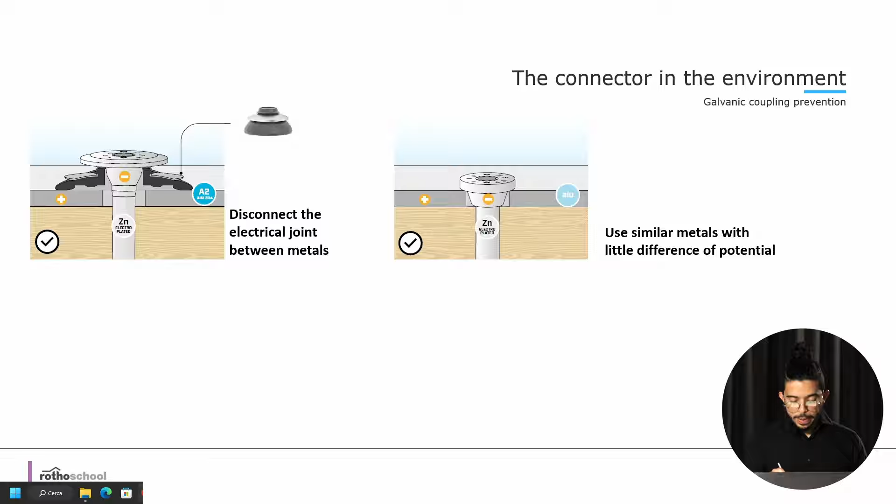You can coat either the anode or the cathode to prevent electrical connection. In this case, we're talking about two elements coated with the same or very similar coating, so there's no difference in the elements making a circuit. So there will be no electrical circuit, and the plate can be aluminum, stainless steel, or zinc. Regardless of the internal material of the plate, the coating will prevent the galvanic coupling in this case.

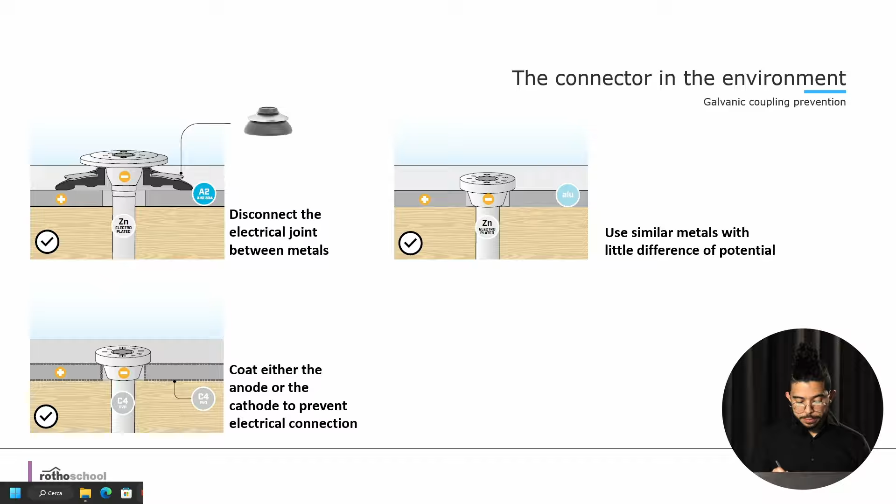Finally, you can control moisture from connecting the two metals. It's a similar principle to the one before. You can do it with a band, a tape, or a membrane—any layer that disconnects the two elements. In this case, this is like a butyl band or butyl tape. Placing it in between the metals, preventing any contact from happening, will also prevent galvanic coupling there.

In some cases, you just can't avoid having dissimilar metals in contact; it's necessary to do it. What we recommend is to always place the most noble element, so the screw or fastener or dowel-type fastener is the most noble element. That way, the element that corrodes will be the plate, and since the surface of the plate is much higher, the corrosion will be a lot slower. Corrosion in the plate will start, but it will take years to corrode the entire surface.

On the contrary, if the most noble element is the plate, then the screw will corrode, and that is a problem because if a screw fails, you have a serious structural problem, and it will happen a lot quicker. So we always recommend the first case if you cannot avoid galvanic coupling.

Concerning design, apart from the selection of metals, you also need to prevent water stagnation. Water stagnation will not only affect the durability of the wood—as you can see here the growth of fungi—but also increase the moisture content inside the elements, which changes the acidity.

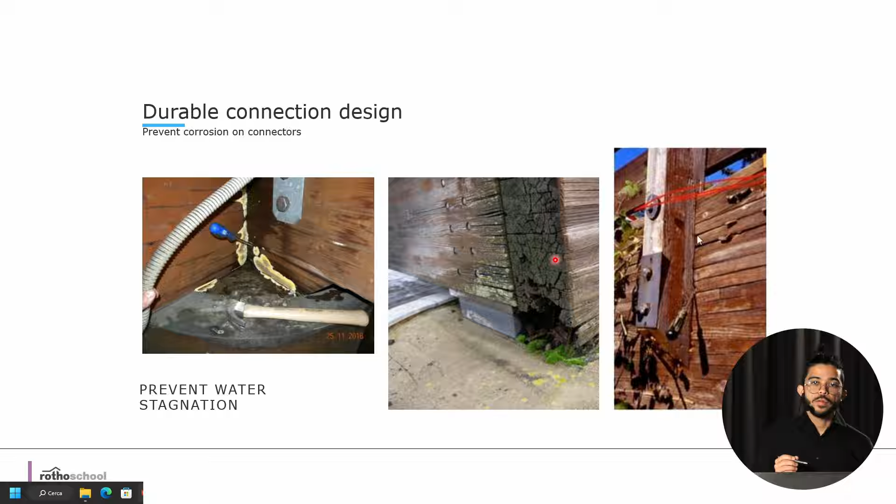The aggressiveness of the timber will then also corrode the fasteners inside it. Working into the construction details to allow water to drain and favor drainage will not only prevent the wood material from rotting or decaying, but also prevent corrosion of the fasteners. Thinking of the connector and the wood as a unique system allows for better durability of the entire joint.

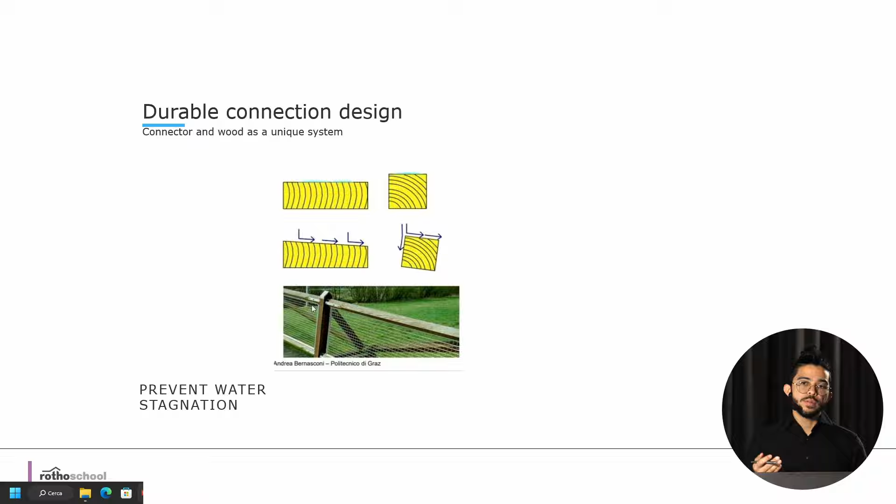The timber also behaves differently over time and in its forms—it has different deformations over time. So here too, allowing for a draining design that favors drainage will also favor the connectors.

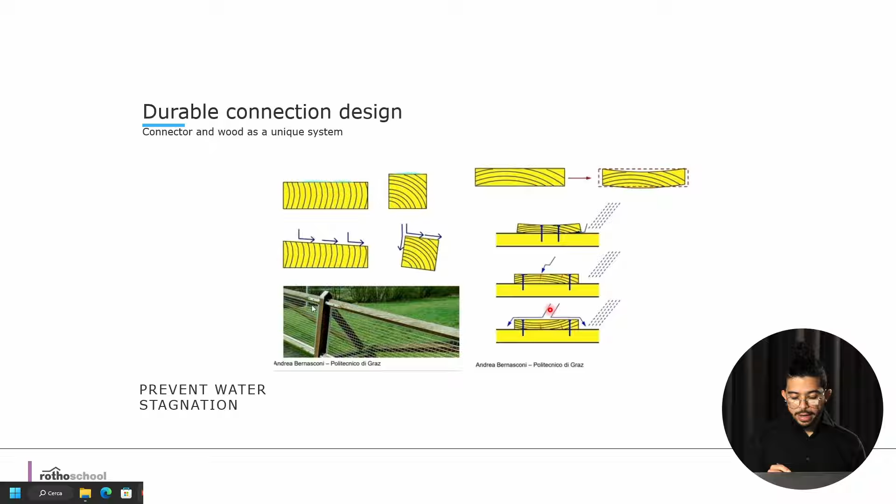If you place the elements by reading the structure of the tables, boards, or any kind of joint, if they are going to be exposed to the elements, you will also favor corrosion depending on the choice of the formation of the boards.

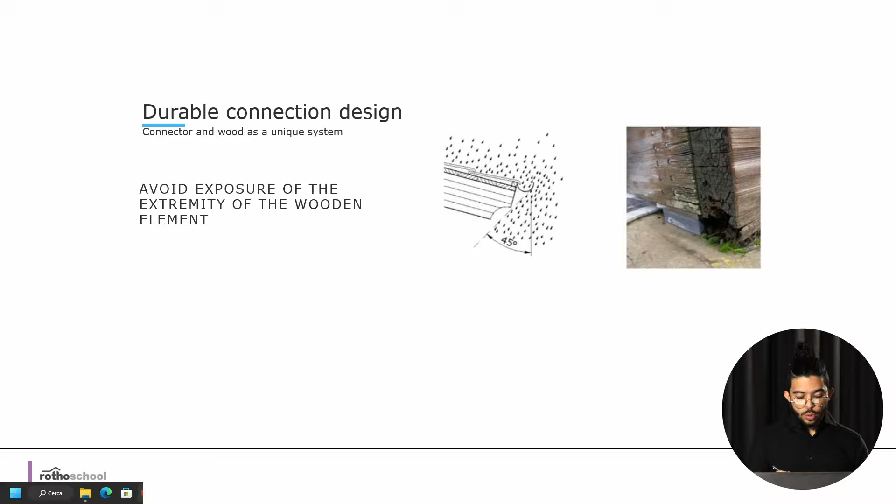An important thing is to avoid exposure of the extremity of the wooden element, as it is the place where the wooden elements absorb the most water, which will then affect the fasteners.

Also, prevent the transport of water by capillarity—related to the point before—not only by avoiding exposure, but also because even if elements are not exposed, in cases where they are connected or in direct contact with moisture, water can penetrate and travel a lot inside the element, affecting not only the timber but also the fasteners inside.

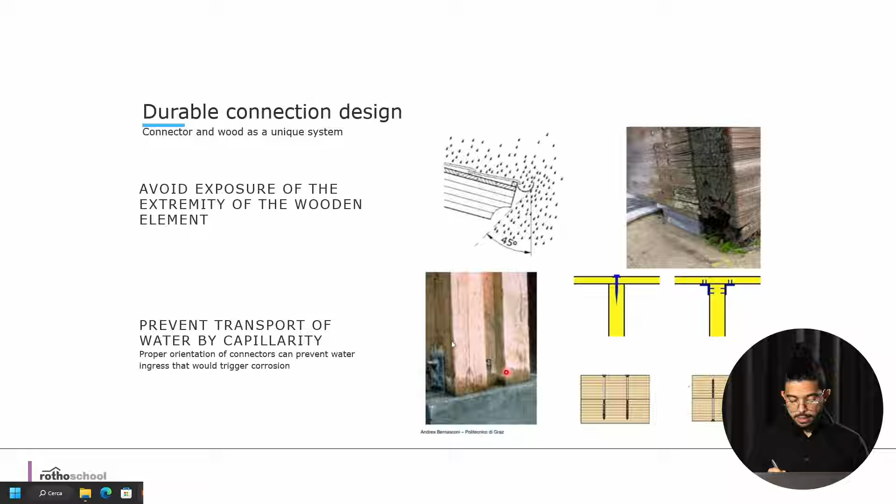Finally, just to finish my presentation, I would like to show you an experimental campaign that we did with several of our screws. We wanted to test the different materials in our product range, the coatings, and how they behave in different environments, especially concerning timber environments, the timber acid T4 environment.

So we tested a lot of different screws in oak. As we saw before, oak is a T4 wood corrosivity class, in service class 3, so outside, in a C2 environment, so the atmospheric environment was not aggressive. We placed 12 samples of each kind of coating that we wanted to check, and each month we would go with a chainsaw and take out those 12 samples to check it. That was to avoid the influence of, well, we didn't just screw it out — we wanted to avoid the damage of screwing the screw out.

So we cut it, and this is one of the main results so far. There are many other things currently being checked that will be presented in a different format, but this is one of the most interesting.

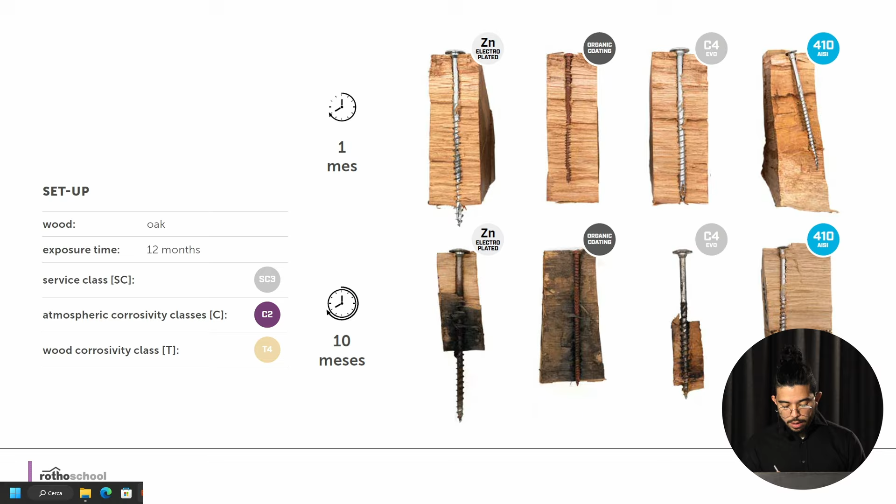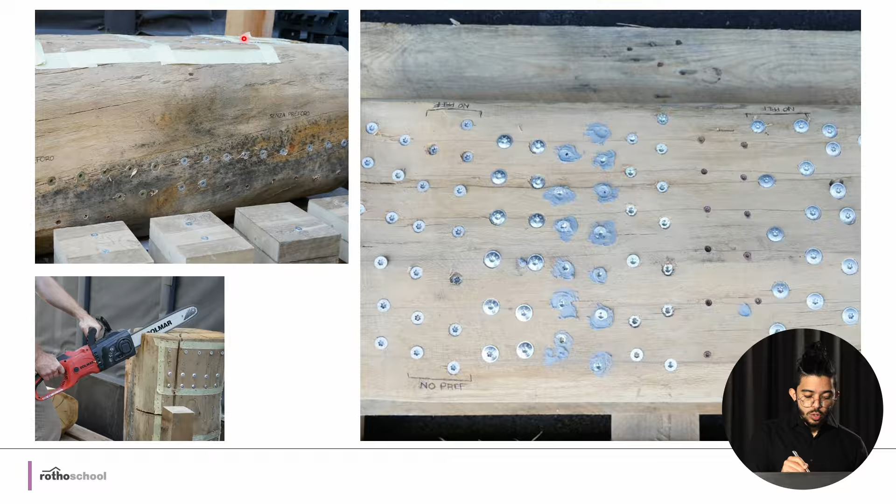There are some other things we're checking: different materials, different positions of the timber. There are many variables, as you can see here, in service class 3 and service class 2 — checking what happens if you block the entrance of water on the surface with a butylic adhesive, what happens if you pre-drill or not, and the difference between exposing them on the surface, horizontally or vertically, because of the position in terms of pollutants, but also if water travels differently inside the element.

The head shapes, head sizes, the distance to the extremity, different coatings in different elements — so there's a lot going on in the corrosion research.

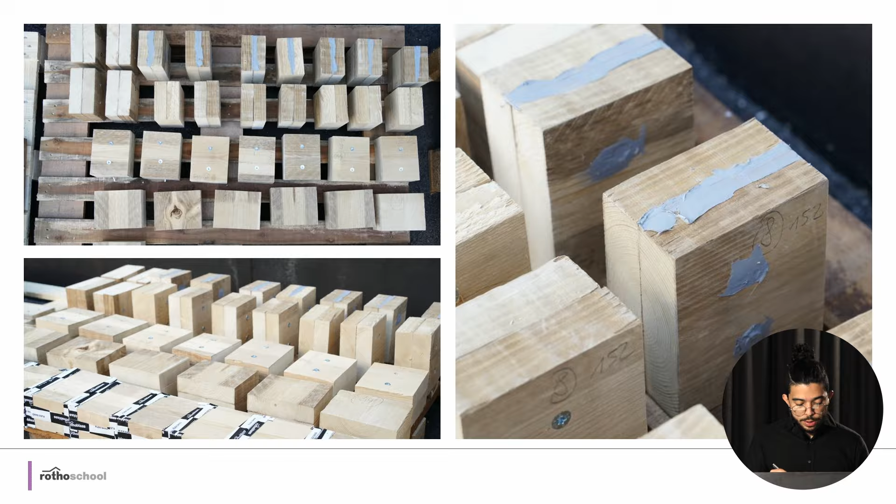Here we're also checking what if you seal the joints, what if you seal the head — would that affect it positively or negatively? What if you seal them with a regular tape? So these can be prescriptions and provisions you could do to make it perform better against corrosion, or maybe the result is, as happened with a lot of them, that it performs worse. In many cases it blocks the moisture from going out, so you end up with a wetter element. But these results will be presented in a further presentation.

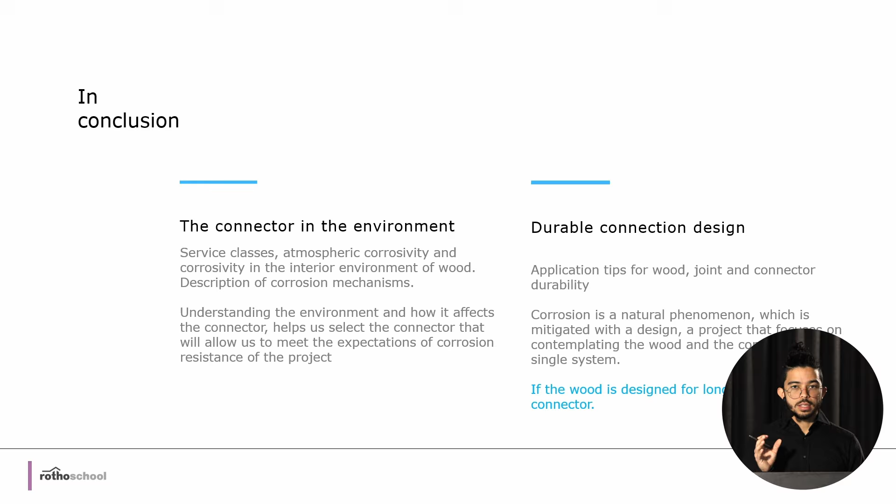So to conclude, I will conclude with a very simple phrase: if the wood is designed for longevity, so will be the connector. So think about the wood preservation and the preservation of the fastener as a unique concept that takes into consideration both of them. Thank you very much.